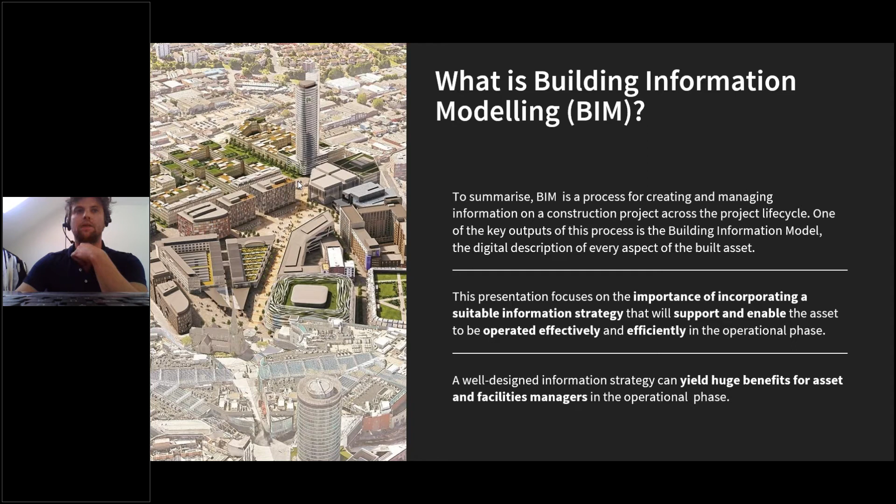So what we're going to do within this presentation is concentrate on how can we maximize this. So the use case for this is primarily the cost. The operational maintenance costs can be as much as 80% of the total life cost of an asset, which is huge.

The grounds to influence really good information strategy is kind of like almost a no-brainer. This should be considered an industry initiative, and I think the industry is waking up more and more to this and why it's so important.

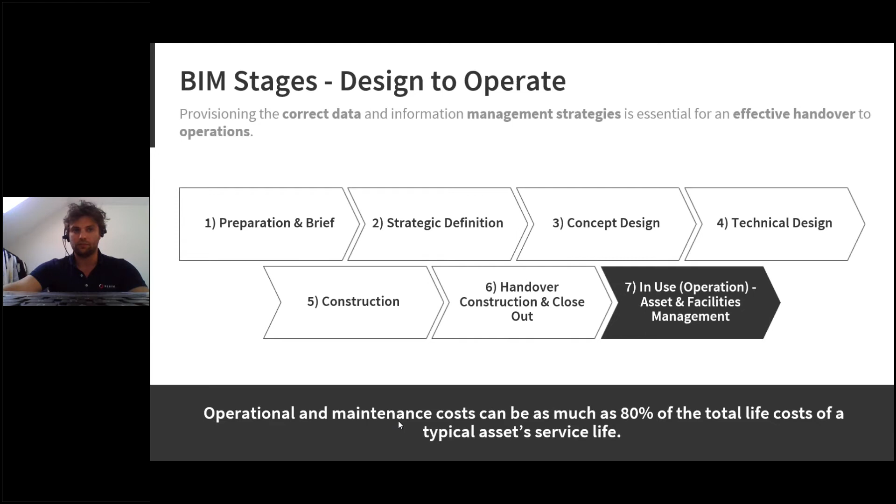Okay, so I'm just going to touch on what some projects have revealed recently. There've been quite a few BIM projects where the asset is being constructed and it's being handed over to the client.

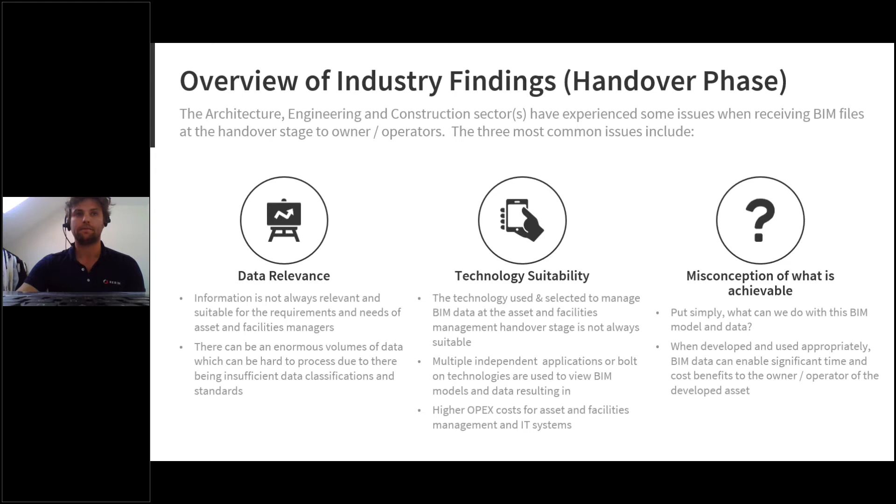Has anyone got any questions? I appreciate I'm rattling through this quite quickly. No, all good at the moment, Ollie. I'm not seeing any questions in the poll.

Okay, so we've worked on a few projects where it's sort of been a retrospective thought. The BIM model is compiled, it's handed over, it's federated, but again the asset and facilities management attributes, the information strategy behind it, haven't been considered. So there are ways we can fix it. It's not our recommended approach, but we'll cover some of the ways we can do a retrospective update.

So what we can do is talk to the asset and facilities managers. What attributes would you like to focus on? Would you like reactive maintenance, planned maintenance, condition monitoring, space management, IoT? We can ask them that, and then we can apply those attributes afterwards.

If they've received a BIM model which doesn't contain useful information for them, we can carry out a cleansing exercise to make it ready and align to what they're trying to do. And likewise, if they've got bolt-on systems and technologies, we can look at other means to interface all that data and the cleansed data into a common data environment which everyone can use and access.

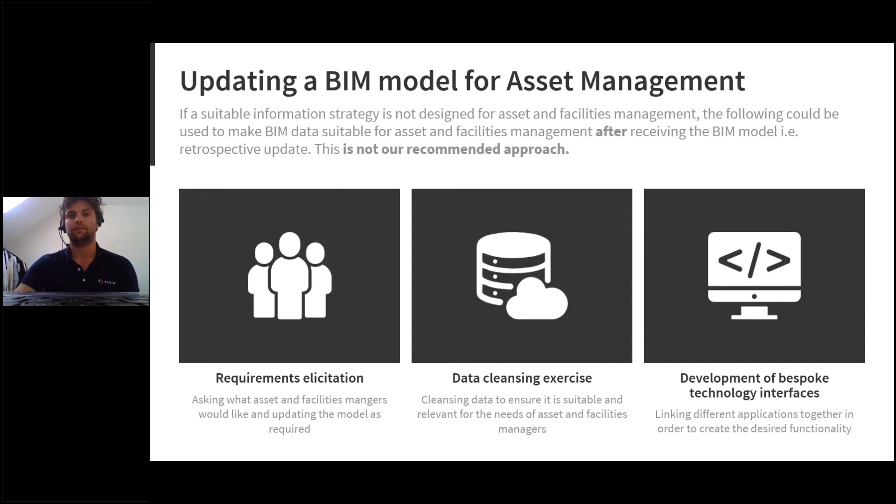So what we're saying is we suggest that you work with and elicit all your requirements before the project's even begun. You talk to all your asset management stakeholders, find out what your organization is trying to do, find out what your employers or any stakeholders associated with that industry want, whether it's maintenance, political, or anything to do with your requirements, that they're all considered into your information requirements.

Now, my focus on this has always been around asset and facilities management, but the horizon is boundless - you can incorporate as much as you want. But when we focus on asset and facilities management, if you get your information strategy correct, it's endless, it's limitless.

So our recommendation is to concentrate on these three. You might have seen these being talked about quite a lot through LinkedIn and other channels - EIRs, AIRs, OIRs - in order to really yield and benefit from these requirements when considered or implemented in the BIM environment. We suggest one CDE, which is scalable, modular and configurable.

So once you've embedded the correct information strategy behind that, the correct data, you can then start to segment what your asset and facilities management requirements are. You can say, I want a module for reactive maintenance, I want a module for planned maintenance, and so on. By getting these right, you will enable your asset and facilities management capabilities going forward.

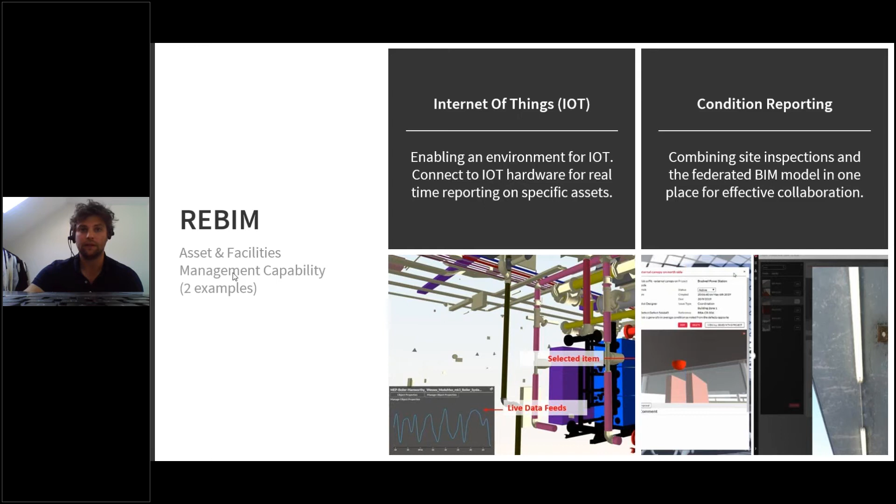Condition reporting as well, closely linked to asset and facilities management. We can do a range of things around that, so link on-site pictures to modules within the application for condition maintenance, plan maintenance or reactive maintenance. If I just go on to the next slide - so what we're saying is we've got the particular component in the BIM model here.

We've raised that there's an issue with it. So we've either found out through an on-site inspection, or someone's phoned up and said there's a particular issue with this component. We found it in the BIM model, linked to it in real life, and then we can assign that to the actual asset itself, and then assign it to somebody else to inspect.

So Andy, he's linked a photo to a component or an asset. He's then logged out, and assigned it to someone else to inspect. The other user would then click into it, find the issue, and see that there's a particular problem with this component.

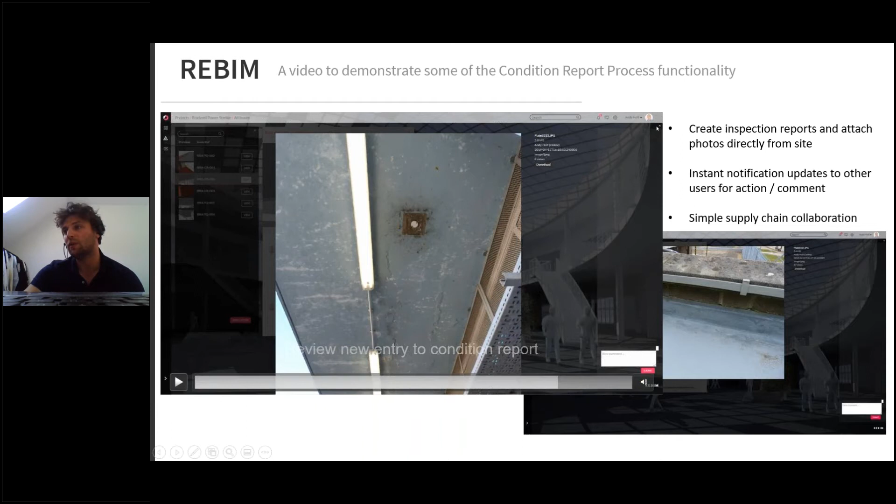The really powerful thing about this is you've got traceability end to end. So when it's handed over, you've got like a task panel, a breakdown, or a history panel for each component, so you can see exactly what's happened. You can attach PDFs to it, attach work orders to it, start scheduling jobs for particular components and assets, and do reporting on it. You've also got the ability, not shown on this screenshot, to talk to other colleagues with our chat system as well.

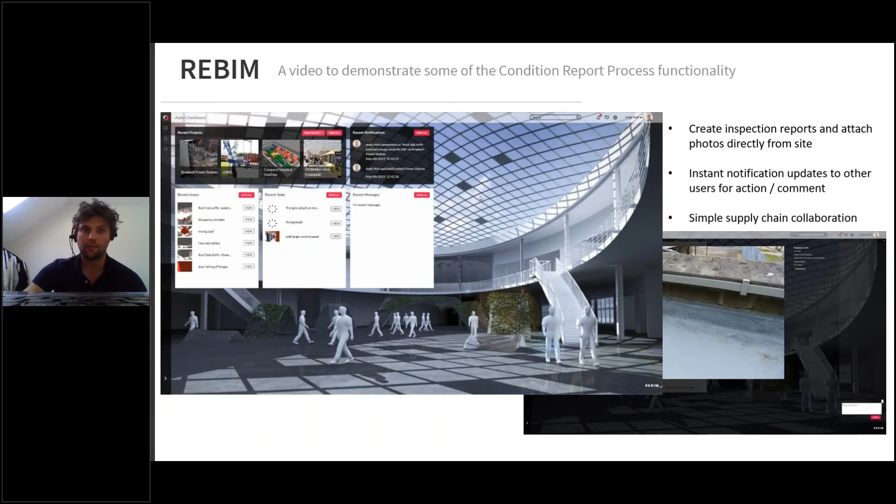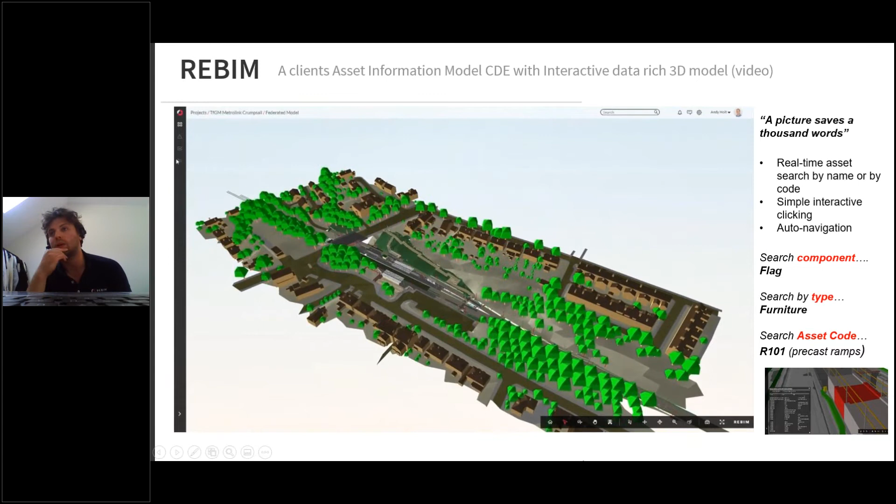So let's move onto the next step, which is an example of where we have created an asset information model - a really powerful way to see what's going on in terms of all your assets and where they are. One of the principles we really firmly believe in is the ability to find something in 5 clicks or less. The software is really powerful in terms of what you can do.

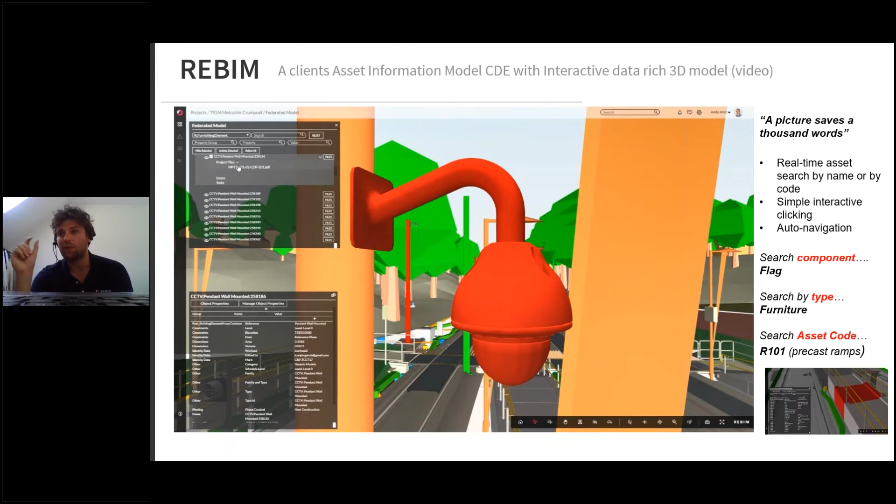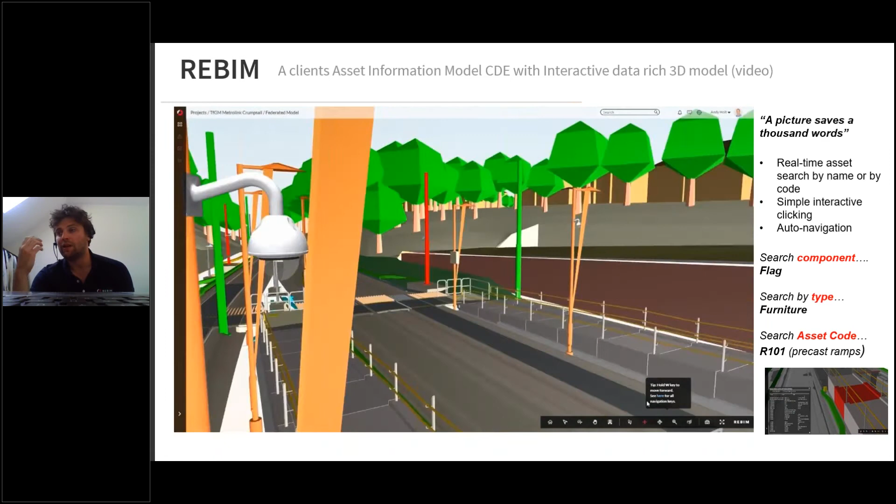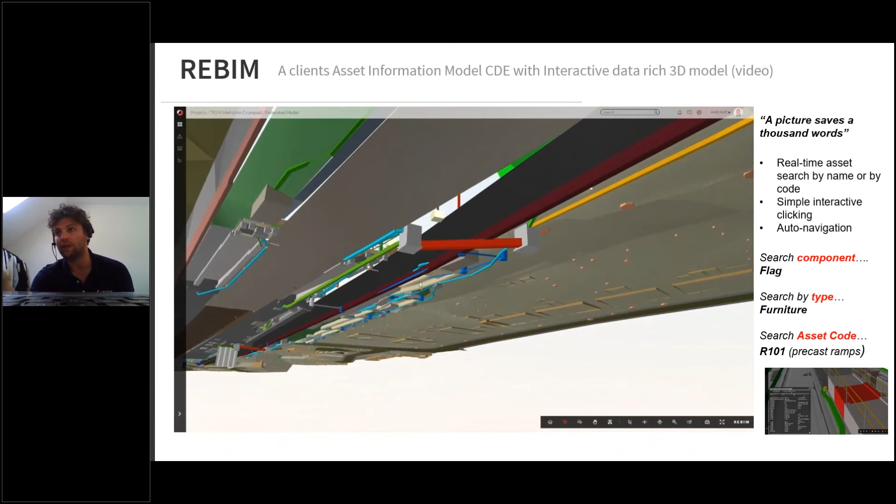You can enter a component, the component serial code, search by type, or search by a specific asset code. You can find information really quickly and easily, including information attached to a component or asset. It's a really powerful way of navigating and seeing assets depending on what you want to do for that particular day. In this example, we're navigating around the train station, and we've got quite a rich information panel here for that component.

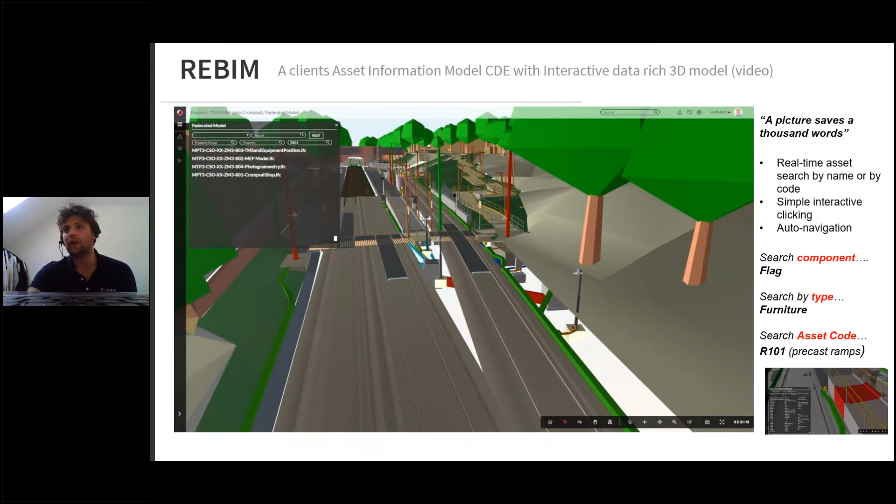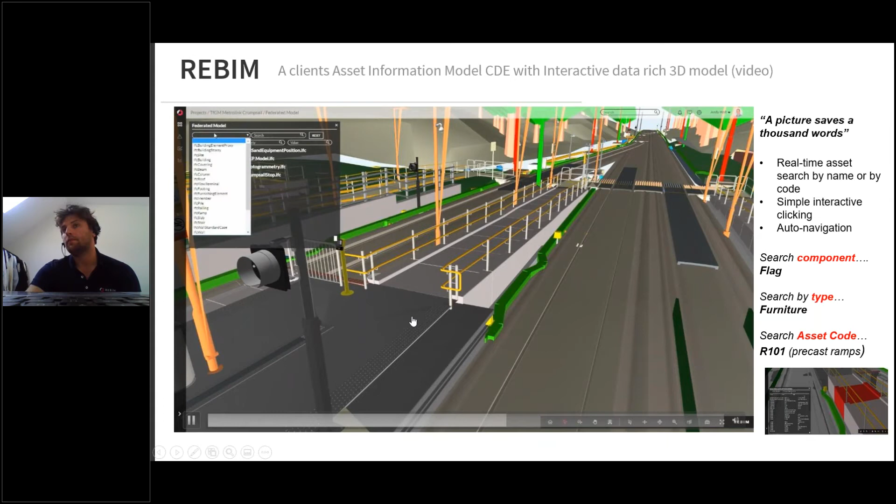We can carry out another search here, and find our asset - this is an asset code for ramps. We've got all the information we need. And just on that, you'll see at the bottom here we've got a really good opportunity for more functionality, where we can mark up images and components for inspections and so on.

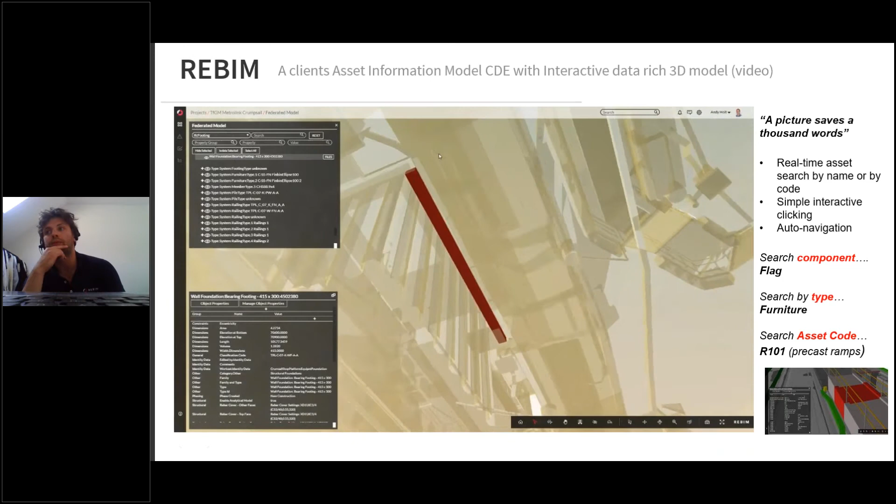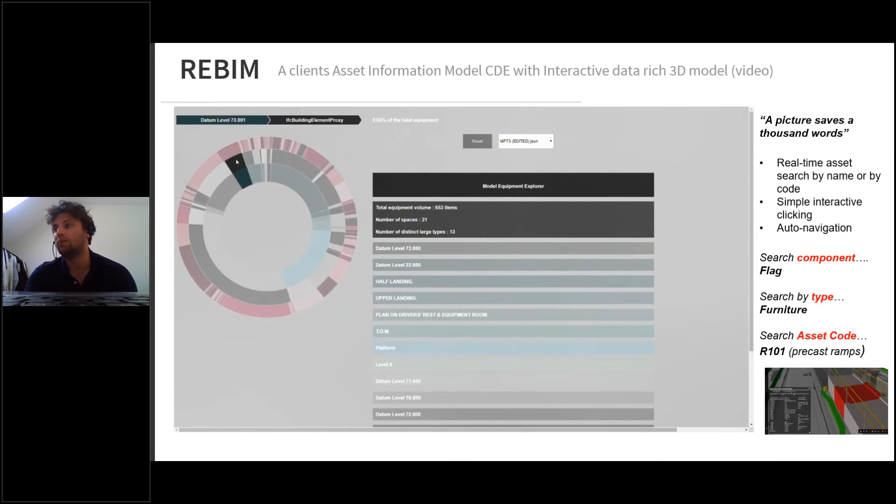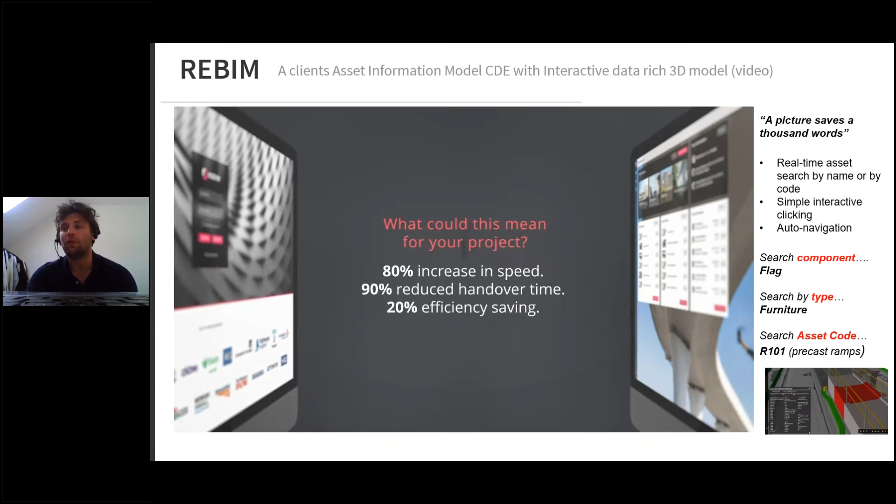Information management is particularly important for what we're trying to do. Just on this piece here, we've got a breakdown of all the components within our BIM model. This wheel is emphasizing that you can query how many, say, asset codes, or how many bins you have, or how many precast parts of the platform you have. How can you find things quickly and easily, and what's the quantity of them? You can do all that, and it can all be enabled through this tool.

So, a really powerful tool. If you've got any recommendations, or anything you'd like to discuss with us, or any questions or queries about what the tool can do, please feel free to get in touch with myself and Andy.

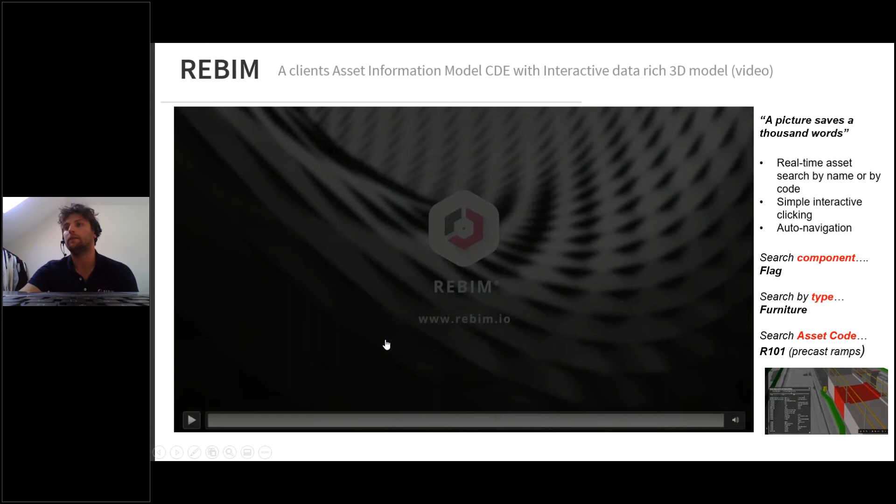I think that's pretty much what I wanted to cover. Just 2 minutes over, so I'll try to keep it to the half an hour.

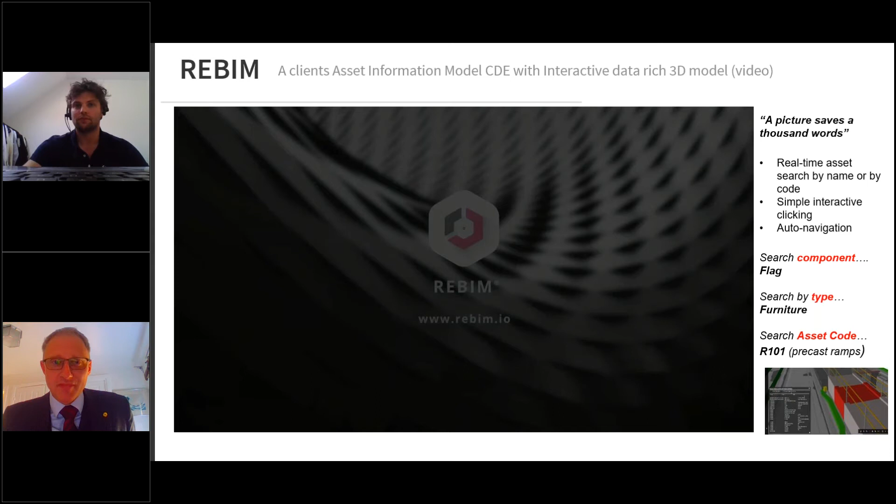You're okay, that's fine. That was very informative. That was excellent, thank you very much, Olli. Really good indeed. Certainly, since I saw the very early days of ReBIM, I can't remember how long you guys have been around now.

Must have been 5, 6 years, something like that, is it? Is Andy on the call? I think it's, yeah, between 5 and 7. Yeah, something like that, anyway. But the amount that you've been able to achieve in that amount of time is very impressive. It's looking very good indeed. That's great to hear.

One question I've got, Olli, is about asset legacy systems - incorporating those into one system. Is that a fairly straightforward operation, or is it complex? I think it depends on what it is you're trying to export.

I've dealt with applications before where you can export a component or an asset quite easily, but then it's all the legacy information that's attached to the asset - you might have invoice records, or tenant records if it's to do with tenure and estate management. It really depends. The ultimate goal is to have a system that can do everything, because, as you alluded to Stuart, you want a system that basically replaces all your other systems and enables your core system to run much more effectively without interfacing to other applications.

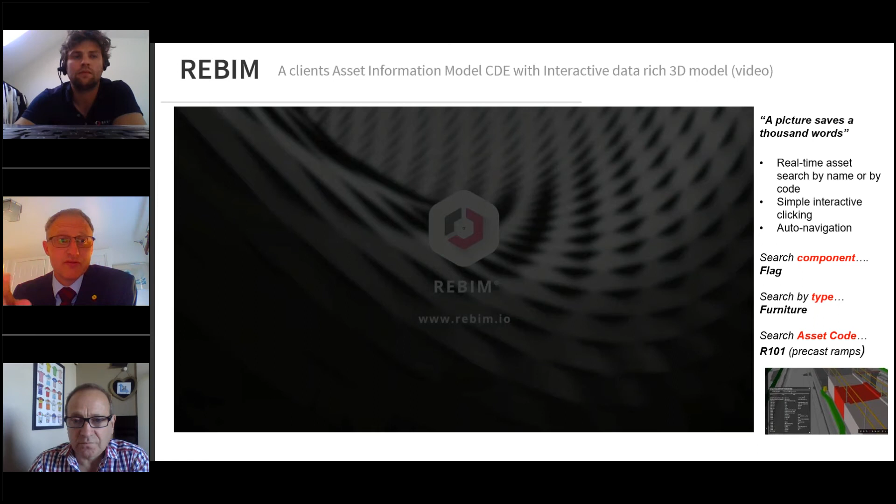Having that flexibility is massively important. One of the things I think a lot of people forget when working on a government and critical national infrastructure project is where is that data? Yes, you put it into your common data environment, but where is that common data environment? Where is it backed up to? Where does the information get routed through? The information might come from my laptop, but because I work for an American company, it gets routed back through my company's VPN, and then back out to the rest of the world. It's always a tricky thing to get right and work out.

Good to see you, Andy. I was just saying, Ian, all the technical questions are probably more for Andy - he's got the real background on that, as the guru. Excellent, good stuff. I see you haven't quite got to a shave this week, Andy. No, this - I'm just relaxing. Coronavirus, you know, we're letting ourselves go a bit, aren't we? The unclean shaven, yeah. Remember the saying, Ian - a face full of fur makes them purr.

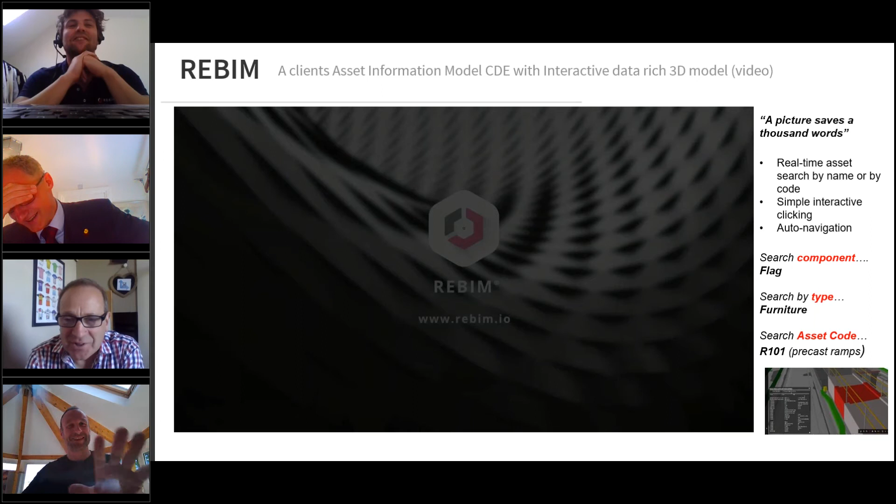I've got a question coming, guys - thanks to Gary for this. What are the top 3 challenges an owner versus EPC should consider for successful implementation? Who wants to take that one? Andy? Okay, so just repeat it, Stuart - sorry, I'm a bit late to the meeting. What are the top 3 challenges an owner versus EPC should consider for successful implementation?

Yeah, okay, so I've spent a bit of time representing client side, so I've got quite a bit of experience of this, especially facing an EPC contractor. The owner really needs to consider life after project. During project delivery, it's very much in the interests of the contractor to just deliver deliverables - they've got their own ways of doing that. But once the contractor goes away, the client's faced with holding the baby, as such - that's the facility and also all the records and data that goes along with that. Quite often the client's team is a lot smaller, leaner, with less time and different skills than the contractor team. So it's about making it as simple as possible to manage going forward - they become the users, not the creators, so it needs to be as user-friendly as possible. The physical assets, obviously, they need to be familiar with. So it's very different - they're the consumers of everything.

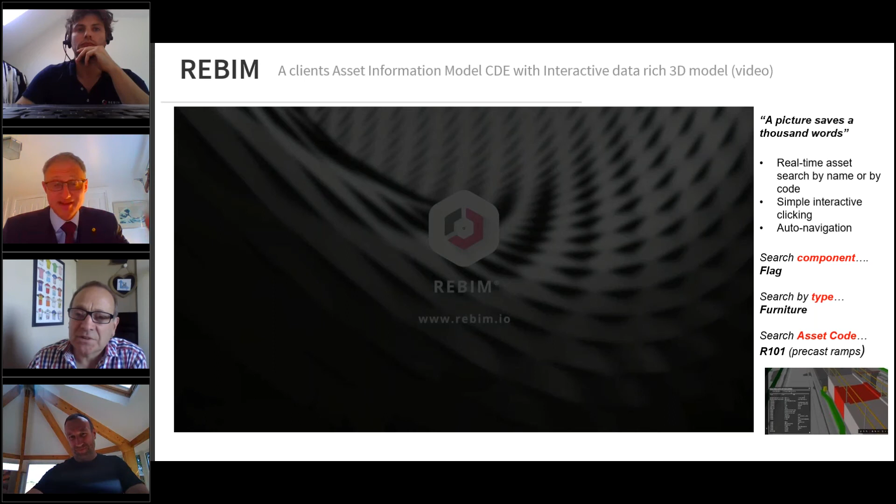Well, it's sort of relevant here - I wondered if anybody had downloaded and read the new National Infrastructure Commission's resilience report that came out yesterday. It included some of the findings of the Commit project - remember the one we did down at Rainham, Stuart? Yes, indeed. We had Clicks and Links, Pixel Mill, Fulcro, Topcon, Bentley, Geoslam as well, coming together with the Royal Engineers to do a project on how we can link all the physical and network system of systems, basically all the cross-sector infrastructure. It's quite pleasing to see that what we did there was published as a recommendation to UK government and infrastructure, which is very pleasing.

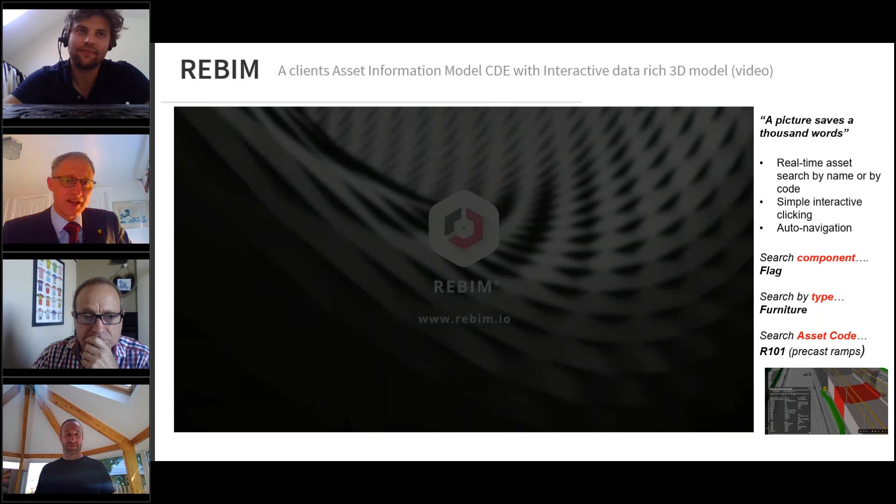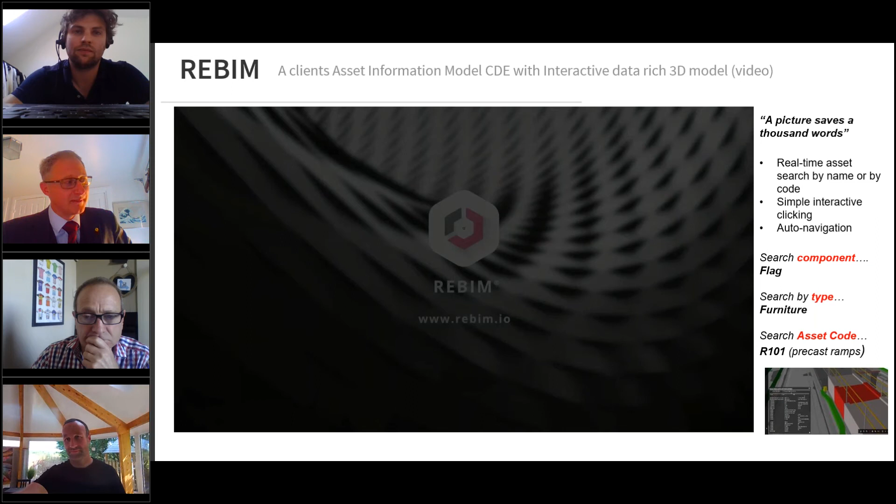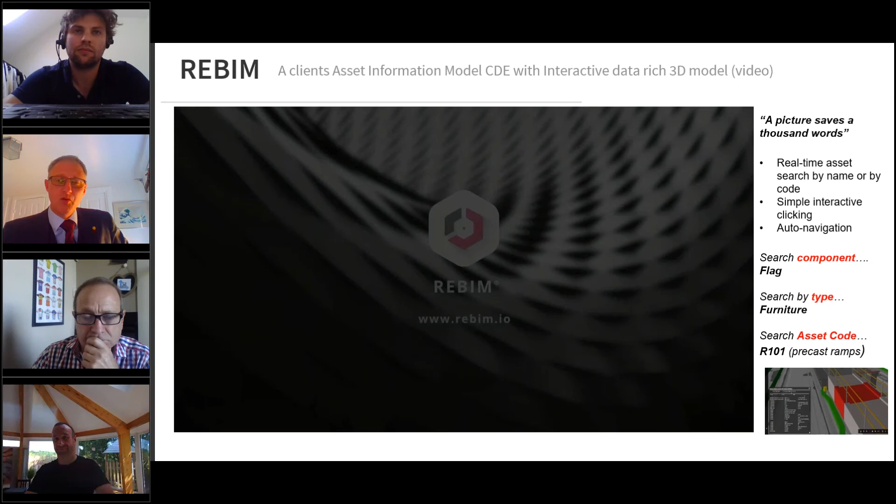So it'd be nice to see a follow-up project on that. But I think the thing about this will be that we need to find a way of analysing and recording infrastructure networks. So I'm starting to look back at Olli and Andy here, to be able to record that in a much more automated fashion, because I can see your system is able to bring in lots of data, analyse it, and then produce some pretty good visual results.